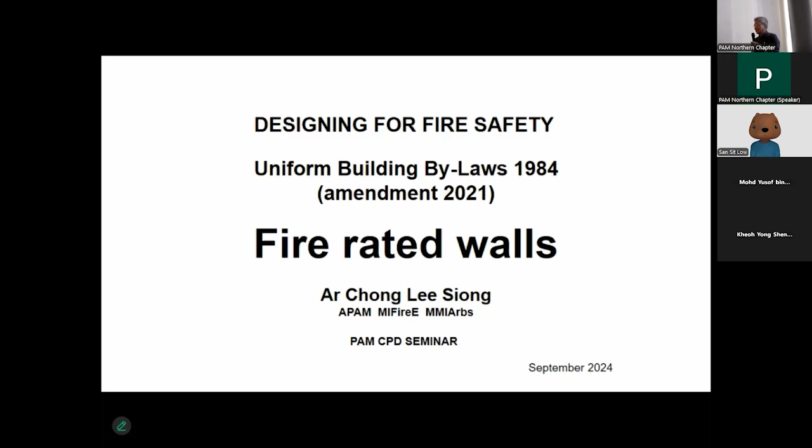this will probably be the last one in my lifetime. It just took us that long to put things together. And really, all the things that I've been saying and talking about, in all these seminars and all over the last 20 over years, I think most of it is really condensed into this book.

So I'm out of a job from today. Thank you very much, guys, for all your support.

I'm not alone. I'm definitely not the only person involved in this. If you read the front page, there were a lot of people, committees. Some people, only a small handful was left from the earlier 1999, the first committee, until now. There's only a few handful of people. We've gone through about 5 different Bomba director generals for this book. So yeah, it has been a very, very long journey, and we are very happy to have been involved in this.

So, further to that, because now officially it's been published, and Pusat Binaan is the custodian of the distribution, the printing and distribution of this book, I've been placed on an embargo. Everybody has been placed on an embargo now.

We will no longer be talking about this book or its contents until Pusat Binaan puts together a formal program. We are in the process of doing a program with Bomba, a formal one that will bring us through a series of courses, maybe you want to call it, that would bring us through to something official.

The original intention before we embarked on the rewriting of this third edition was that actually Bomba started with wanting us to assist them to formalize the Kursus Bomba for the firefighters to be implemented at Kuala Kubu Baru. So we did. We actually came up with a lot of contents, and we passed it on to Bomba, and they're already implementing it in Kuala Kubu Baru.

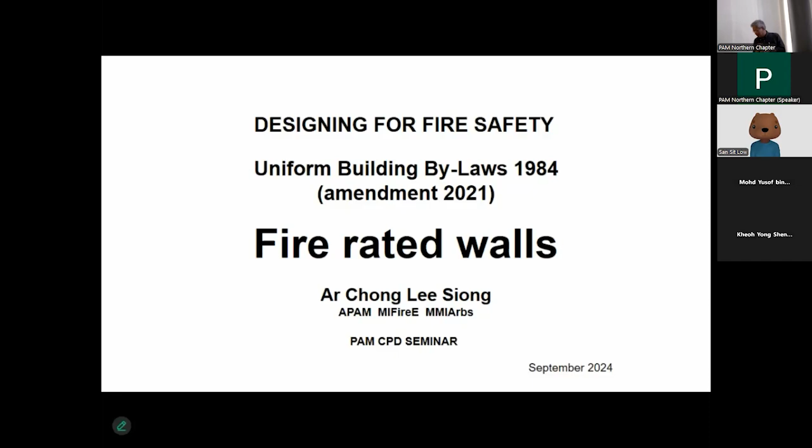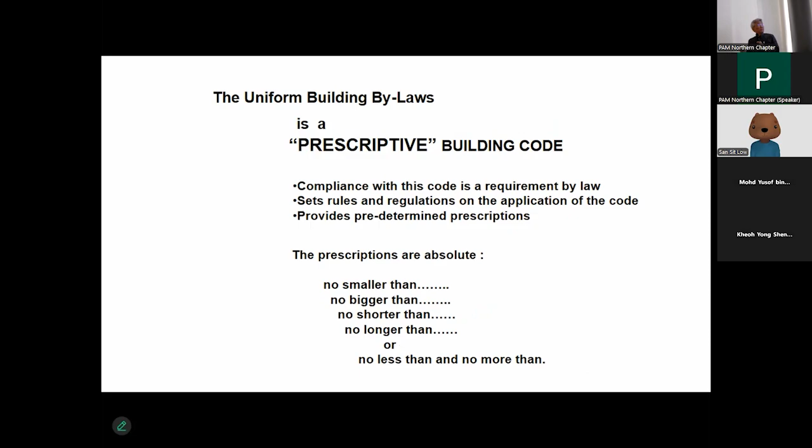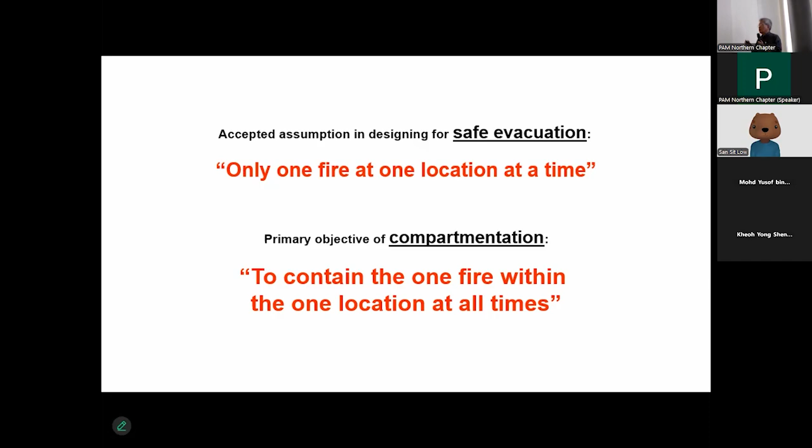Okay, so fire-rated walls. The UBBL is a prescriptive building code. We all know the concepts of fire safety. Firewalls are all about compartmentation. We always abide by the principle that when designing for safe evacuation, we're talking about only one fire at one location at one time. But compartmentation's purpose is to contain that one fire within that one location at all times. That's where compartmentation elements come in.

Particularly on fire-rated walls, in the UBBL we have 6 different elements specifically prescribed: party wall, separating wall, compartment wall, external wall, protecting structures, and partitions. So there are actually 6 elements here, and the common element is, of course, the word wall. We are now talking about walls.

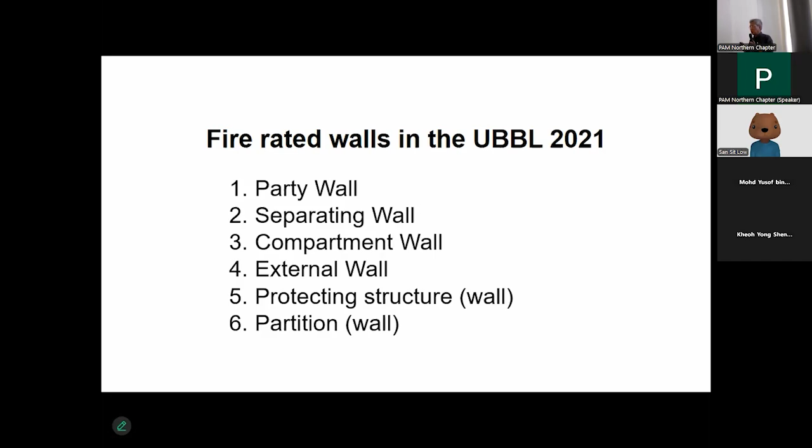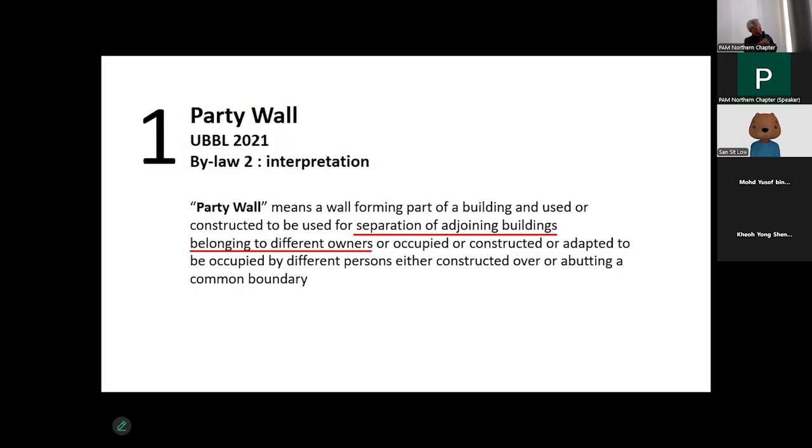So let's start with party wall. What is the interpretation of a party wall? This is something we all do every day. By the way, all of these slides are not my writing, they're extracted verbatim from the UBBL. So, party wall, by definition in the interpretation of the UBBL, simply means a wall forming a part of a building, or used or constructed for the separation of adjoining buildings belonging to different owners.

This is in Bylaw 86. Now, Bylaw 86 is not in Part 7 or Part 8 of the UBBL, where we always refer to for fire safety. It's in Part 6, under constructional requirements of the UBBL. So in a way, it's not directly related to fire safety per se. A party wall is an element for the sole function of being a physical separation between 2 buildings belonging to 2 different owners.

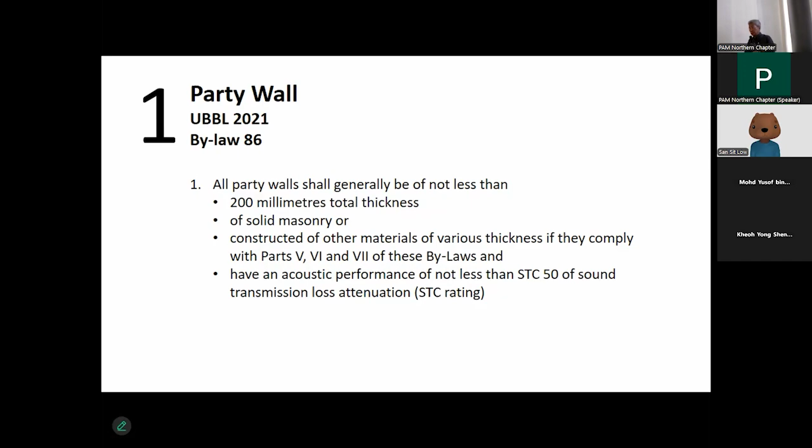So Bylaw 86 doesn't prescribe fire rating, but it prescribes the physical qualities expected of a party wall. That is what clause 86 prescribes. It says all party walls will generally have a prescribed thickness — a party wall should be minimum 200 millimeters thick, and constructed of solid masonry. So that's the base: you expect a party wall to be constructed of masonry and minimum 200 millimeters thick.

Then, with the amendment to UBBL 2021, I'm stepping into the boundaries now — never mind, I'll do it quickly and then we'll stop. Included in UBBL 2021, we've added another clause to bring it up to date: it can be constructed of any other materials of various thickness, provided they comply with Parts 5, 6, and 7 of these bylaws. Another addition in UBBL 2021 is to have an acoustic performance of not less than STC 50. So these are the physical qualities regulated in the UBBL 2021, expected of a party wall.

So it's a constructional requirement. It's really not meant for Bomba to tell you that you must indicate 200 mm thick masonry wall as a party wall. I know Bomba has been doing that - they're actually going beyond their jurisdiction when it comes to party wall. What Bomba should be doing, I'll describe later. But as far as what you specify for the party wall, it is not Bomba's business - it is ours. And which authority will be the one looking at this? It should be the local authority, the AHJ, authority having jurisdiction on this.

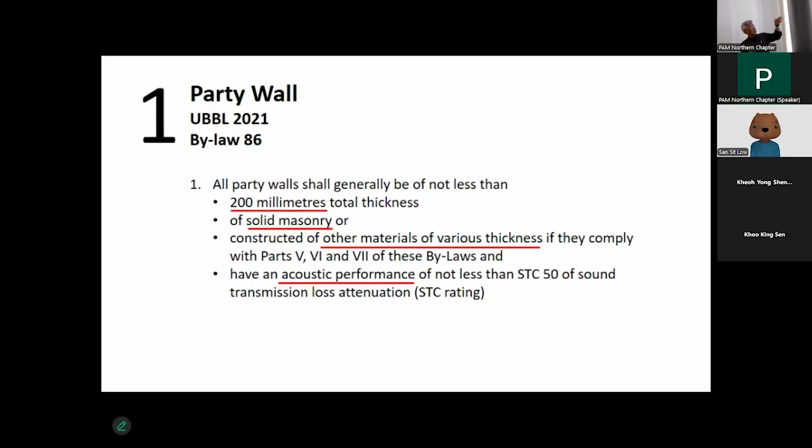And the same bylaw continues: such a party wall shall be made up of 2 separate skins, and each of the skins shall not be less than 100 millimeters thickness. Now you might say, oh my goodness, just now you said the solid masonry wall is 200 mm, and now you're saying it's made of 2 separate skins. No, it's okay, because it says it's constructed at a different time.

That means a party wall must be minimum 200 millimeters thick, constructed of solid masonry - they're expecting a solid wall between 2 parties. But if you happen to be constructing the buildings at 2 different times - if you build a semi-D first without your neighbor building theirs, and the owner of this semi-D is not going to pay for the neighbor's part of the thickness of the wall - go ahead, you can construct 100 mm. Simply because until your neighbor comes, that is not a party wall, it's just an external wall. It's only when your neighbor comes along that it becomes a party wall, and your neighbor builds his half of the wall. That's the purpose of this.

Number 3: multi-story residential buildings of reinforced concrete or other frame construction shall be constructed to the requirements of the bylaws, and the party wall thereof shall not be less than 100 millimeters thick. Now remember, I think we went through a lot of problems with Bomba - they're saying that if you build an apartment, the party wall, I want 200 millimeters thick. And we're saying, in the world, Bomba is not even in their jurisdiction here.

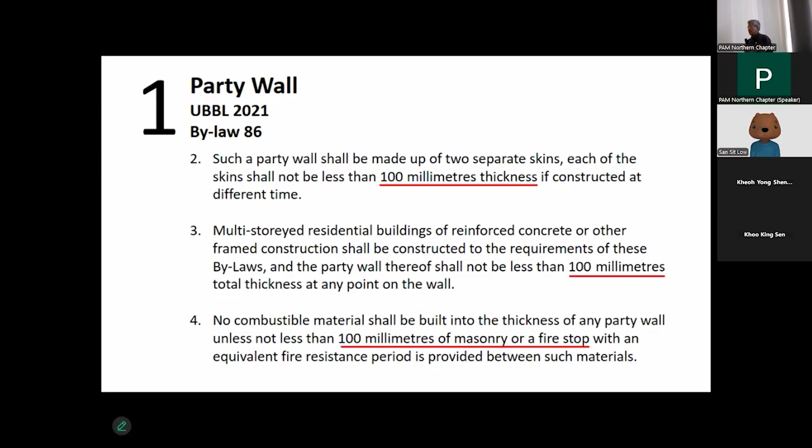Openings may be left in a party wall, provided written consent of the owners of the properties concerned is obtained in accordance with bylaws. And every opening in a party wall shall be reinstated to its original state, properly bonded, consistent with the use of such opening.

So why do we have this specific clause in a party wall, but not when we talk about compartment walls or separation walls? We don't have this clause there. Well, remember, this is clause 86, and clause 86 is in Parts 5. It's not a fire rating requirement.

So a party wall needs to be solid. And for fire safety, we do need fire separation between two adjacent parties. Now, if the two adjacent parties agree that they want to connect—say I bought two adjacent semi-D houses and for my big family I want to break down the wall to make one single bungalow—then there's no longer a party wall requirement. The functionality of a party wall ceases to exist if it becomes one single owner, or if the owners consent that they want the wall removed.

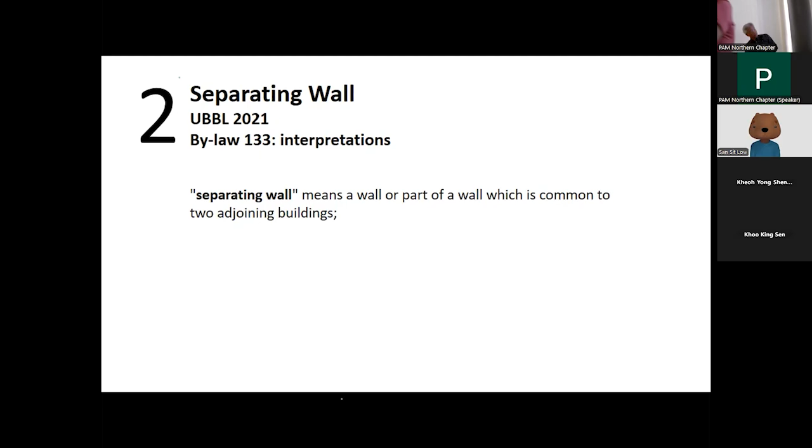So, separating wall, bylaw 141, subject to the exceptions specified, etc. The rest of it really just says that the separating wall...

If it's a separating wall, then you must respect that wall as a fire-rated wall, so you have to talk about the passing of flues and all that.

Now, the other thing—if it's a party wall, would you have a utility pipe or any services passing from one building to another? You just don't have that situation, isn't it? You definitely will not want your neighbor's plumbing going through the party wall into your house. It doesn't happen.

But if it's a separating wall, you figure it's serving its purpose as compartmentation. But if it's a single building, you may actually have services crossing each other. So under bylaw 141, as a separating wall, you have to preserve the fire integrity. This is where it specifies the prescribed minimum requirements of what can or cannot go through the wall, and when you require fire stopping.

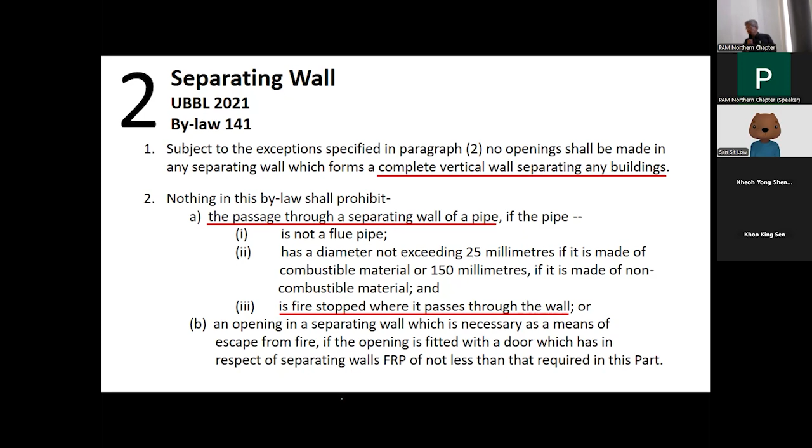So any separating wall which forms a junction with the roof, carried, etc. Now this is where the extension of separating wall above the roof comes in.

This requirement doesn't appear in the party wall. In a party wall, all it says is that you must have a physical separation between you and your neighbor. It doesn't talk about anything else, right?

But whereas in the 141, under the prescription of separating wall, it says that a function of separating wall is fire separation. So this is where it says that if you have a roof going over two adjacent properties, the separating wall itself must form a fire separation between the two parts.

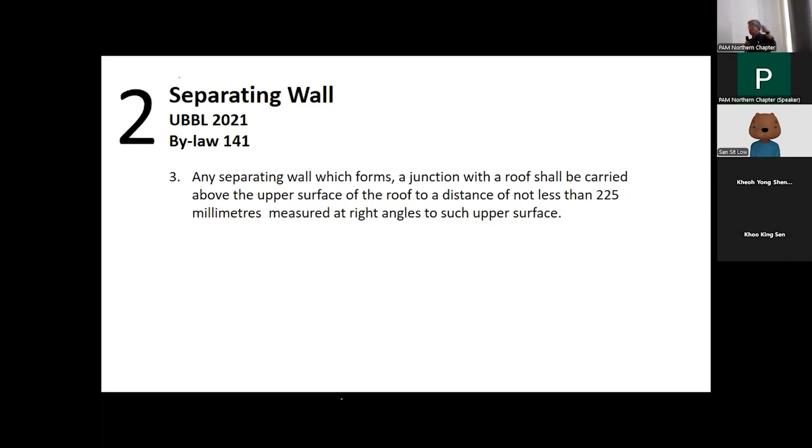That means even the roof has to be separated. You cannot have the roof of a neighbor, or whatever fire flame spread properties of the roof, be continuous across to your roof. That's the purpose.

Now, number 3, compartment wall. We just talked about separating wall, which is supposed to be separating fire. Now why are we talking about compartment walls? Is the compartment wall a separating wall? It may be, right? A separating wall may form part of a compartment wall, and a compartment wall may actually be functioning as a separating wall in certain situations.

So what is a compartment wall, and by inference the compartment floor? It means, respectively, a wall and a floor which complies with bylaw 148, and provided for the purpose of bylaw 136, to divide the building into compartments for any purpose under another bylaw.

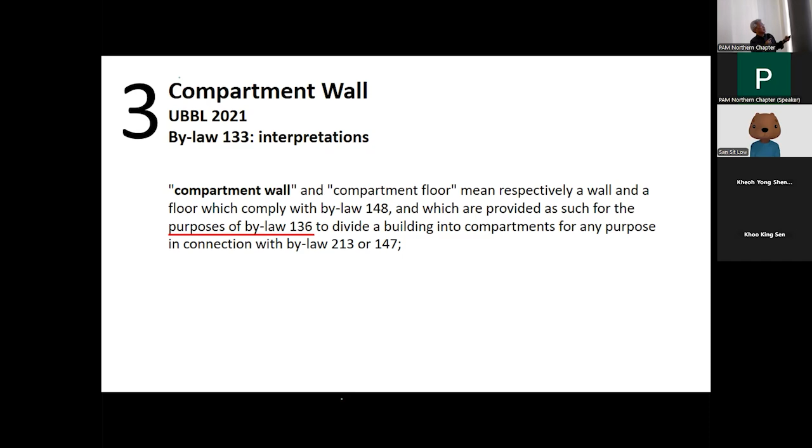Right, let's go straight into it. Generally, compartment walls are used for the purposes of first complying with, say, the fifth schedule. The fifth schedule defines fire compartment limits to your floor areas and to volumes for all the different building classifications. So when you need to subdivide a building into manageable fire compartment sizes, the elements you use to do that are called compartment elements, which are compartment walls, floors, and structures.

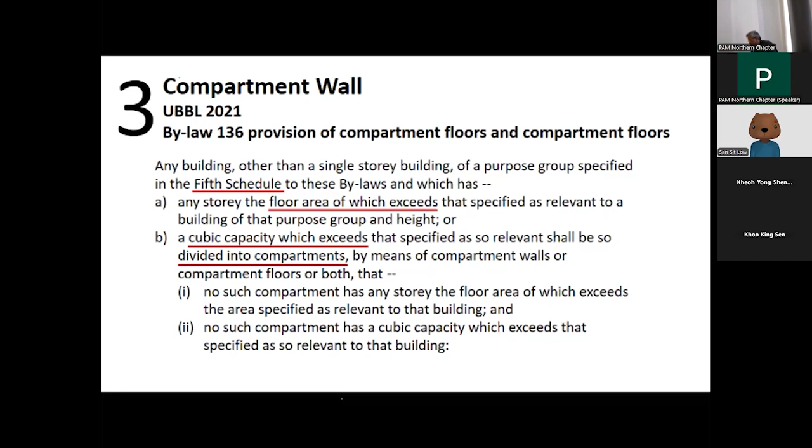Okay, never mind. Right, the following floors and walls must be constructed as a compartment floor and wall.

Actually, the better way to describe it is that these are the elements, or these are the areas of the components of the building, that should be compartmented, right? They should be fire separated from the other parts of the building.

So a flat or a maisonette, in other words, every single occupational unit in, say, an apartment, in a hotel, in an institutional building, it must be fire separated.

Any wall or floor separating a part of the building from any part which has got a different purpose group.

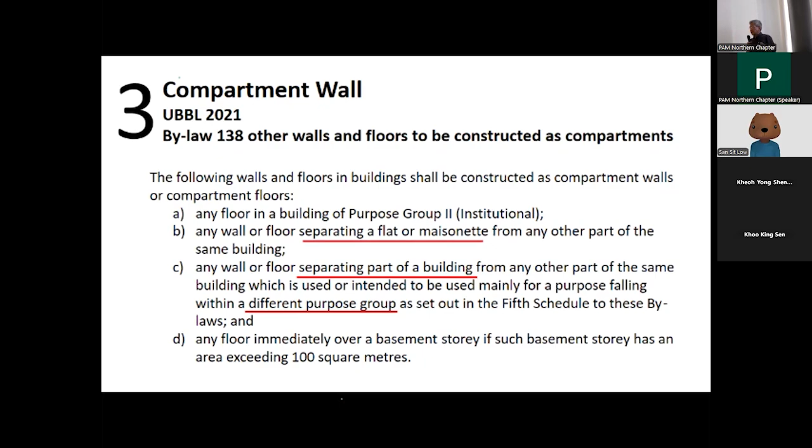Compartmentation of a basement, right? That means it's the horizontal element that separates a basement from an upper floor of a building.

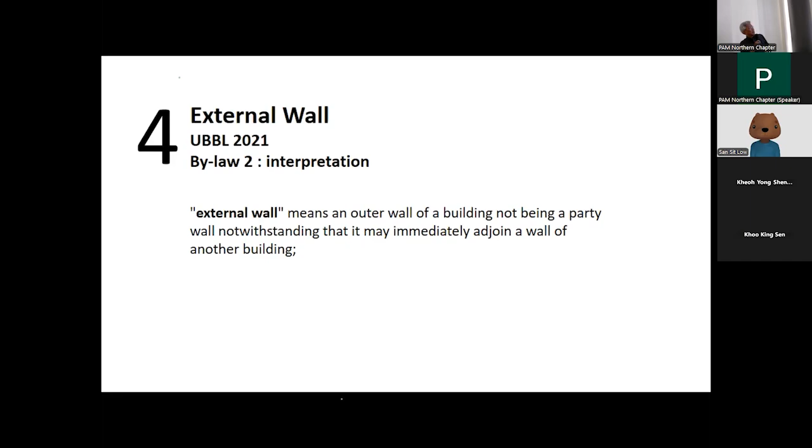Right, then we have external wall. External wall means an outer wall of the building, not being a party wall, notwithstanding that it may immediately adjoin a wall of another building.

So external wall. Now, there have been a lot of queries on this. Even from Bomba, there are some Bomba officers who say, hey, your external wall, what's your fire rating of your external wall? You must have a 2-hour fire rating on your external wall. They say, yeah, thank you very much. If I have a 2-hour fire rating on my external wall, that means I have no windows, right? You want me to put roller shutters on all my windows?

Do these blinds need to be fire rated as well? So the concept of external wall is very simple. External wall means external. If a fire is burning in here, the fire burns outside. What is the risk? What is the separation between the fire here and outside?

That's where the sixth schedule comes in. Okay, we all remember the sixth schedule, right? Very good. There'll be another 5-day lecture on that. So that's where the sixth schedule comes in.

You see, the requirement of an external wall to be a fire wall comes from the exposure, the proximity of your building with the adjacent property or with an adjacent risk. So on the elements, on the surface area that you require protection by calculation from the sixth schedule, that is the portion of the wall or the surface area that will require fire rating.

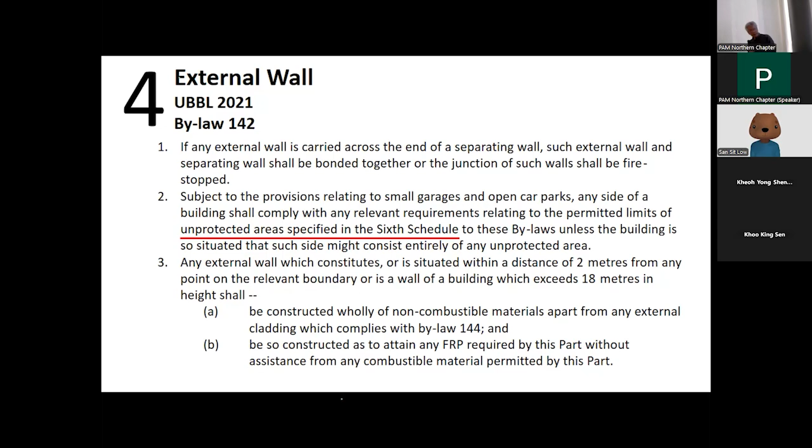And of course, when we talk about the elements that we clad on the external walls, that's where BS 8414 comes in, and we've already gone through that. So cladding on external wall, this is where BS 8414 comes in. The BS 8414 has got, I would say, nothing to do with fire rating - it's not for the purposes of specifying fire rating on the external wall. When we talk about fire rating, we're talking about fire penetration through the wall. BS 8414 is purely to control the flame spread of fire on the surface of the external wall.

So this would be read in conjunction with the sixth schedule. It is not to be independent - you do not say I comply fully with BS 8414, therefore I ignore the sixth schedule. It doesn't work that way. This is for the purpose of cladding, or if you're using sandwich wall construction like TMO, that will be subjected to BS 8414 Part 2. So that is not to specify the fire rating of the wall - that is purely to comply with BS 8414.

However, I do a bit of advertising - if your wall is subjected to the sixth schedule, and you need a certain percentage of the surface area to be fire rated, you can actually still use TMO, because TMO has got two certifications. They've got the BS 8414 Part 2, which is flame spread, and they also have the fire rating certification - two hours. So you have to recognize that these are actually two totally separate specifications: fire rating and BS 8414, which is flame spread.

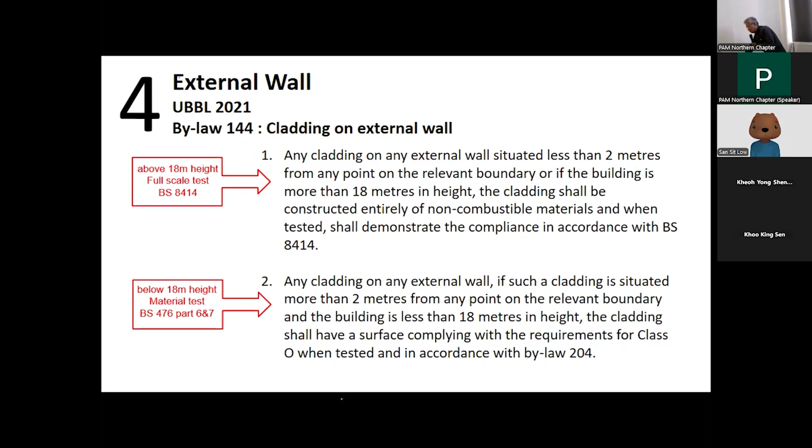Then, external walls - there's also this requirement of horizontal and vertical barriers on the external wall. We're all very familiar with this. So again, this is where the fire rating part comes in. You may have cladding on the outside, so I've got BS 8414 already, but don't forget, you still need to comply with the sixth schedule. Or even if the sixth schedule is not relevant to your project, you still have to, at the very least, comply with the horizontal and vertical barriers on the external wall - these are the flame spread barriers. Most times, the perimeter beams and perimeter masonry spandrels will make up these elements, and the cladding that you specify will be going in front of these elements.

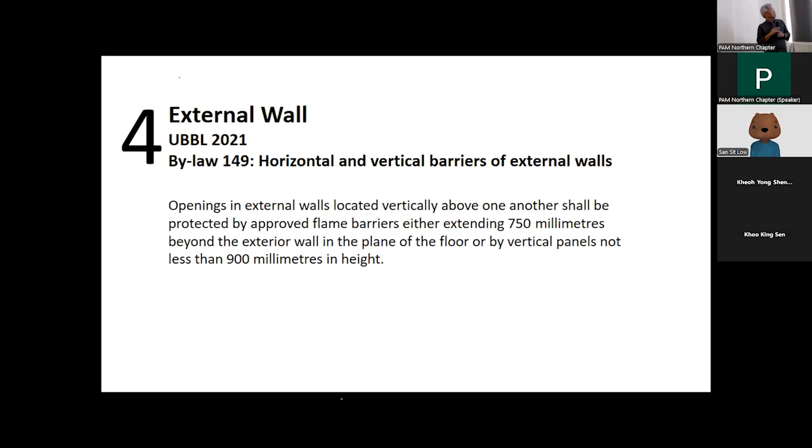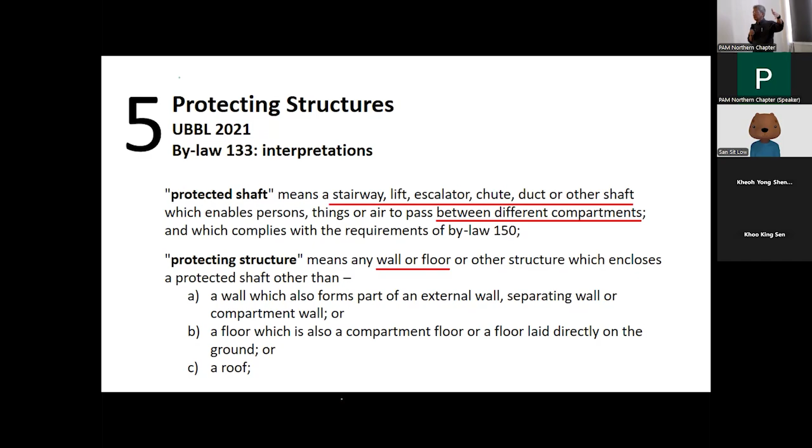Right, protecting structures. So on fire rating, protecting structures where FRP is specified, you go for protecting structures - protecting shafts. Protecting structures means a floor and wall, or any structure that's supporting the floor and wall that requires the fire rating. So I think that's pretty obvious.

Even in protected lobbies, any partitions having an FRP of not less than half an hour will require fire rating. And of course, we all know of elements of structure - any member forming part of the building. These are the exact descriptions of what constitutes an element of structure. When we say your building is subjected to a minimum 2-hour FRP requirement, that means every single element of structure, every one of these components, shall be constructed to have an FRP of no less than what's specified.

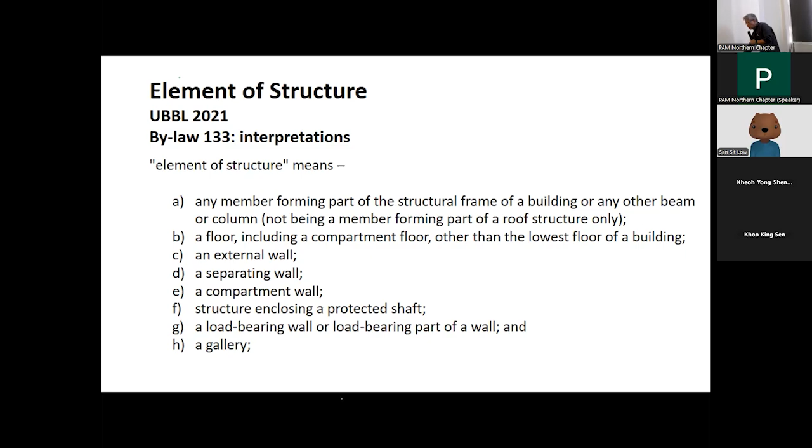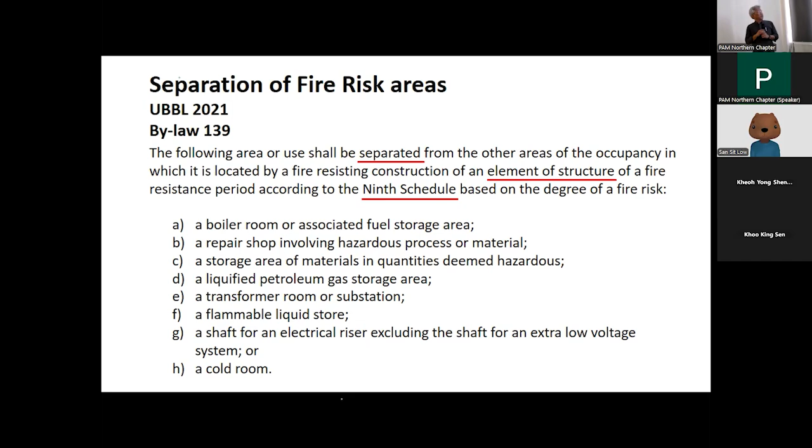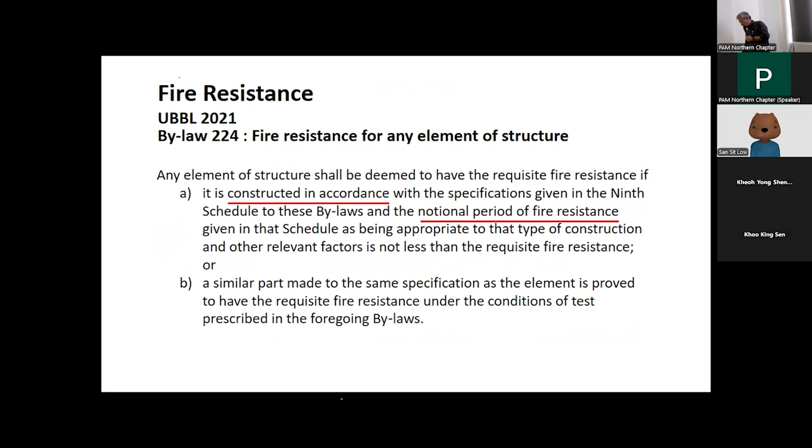And the fire resistance shall be as specified in the 9th schedule. Any elements of structure that form part of those fire separating components, or that hold up the fire separating components, must be similarly fire rated. So we're talking about FRP now - fire resistance period, fire ratings.

How do we determine if these elements comply, if what we're specifying complies? Well, the first thing is that in the UBBL itself, we already have the full list of all the deemed-to-comply elements of fire rating. But in any case, all of it comes from here.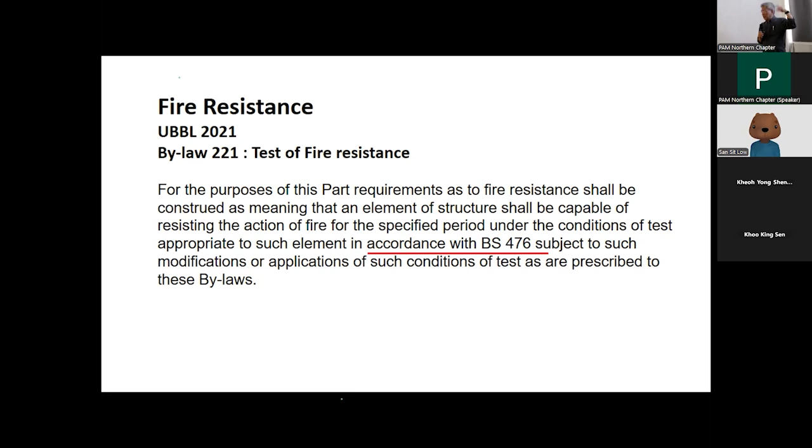Test of fire resistance - it will be in accordance to BS 476. Lawrence mentioned BS 476 earlier this morning. Now, BS 476 is on the way out. It's been around for too many years, and it's been superseded by the new EN standards and basically all the international standards and new methods of testing. There are about 25 different parts of tests in BS 476 - they're all kind of outdated, because the 476 is just very, very limited in terms of its application. I'll be talking a little bit about that later when we talk about fire stops.

So now come back to the critical question: party wall, separating wall, compartment wall. When is it a fire wall? When is it a party wall? When is it a separating wall? When is it a compartment wall? How do we specify the buildings we design? How do we refer to that?

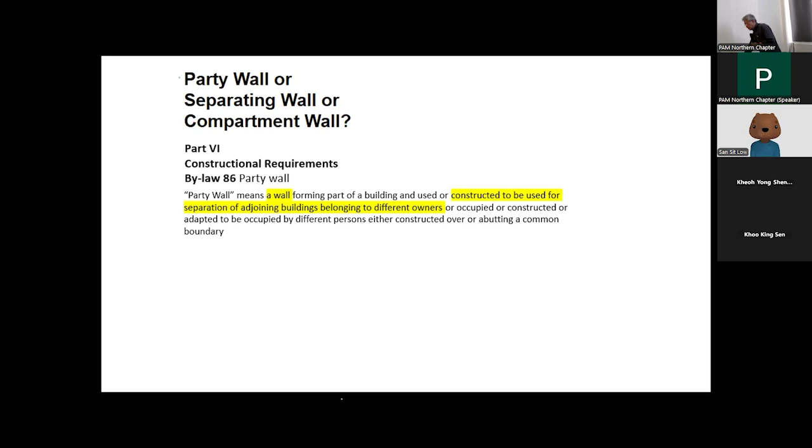Okay, so we go back to the specification. A party wall means a wall constructed to separate adjoining buildings. So the regulations for a party wall - you look at the compartment, the fire safety requirements. Under construction requirements, the only mention of a wall of any interest is that of a party wall. Under fire safety regulations, there are specific specifications for how you construct a compartment wall, a separating wall.

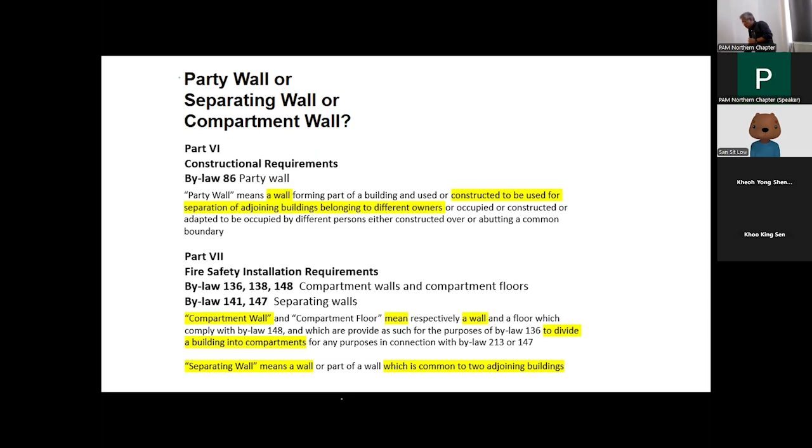So as an example, if you talk about a terrace house, the wall separating between you and the neighbor is definitely a party wall, right? So you have to construct it as a party wall - it's landed property. So what are the physical qualities of a party wall? 200 millimeters thick, masonry construction. That's it, very simple.

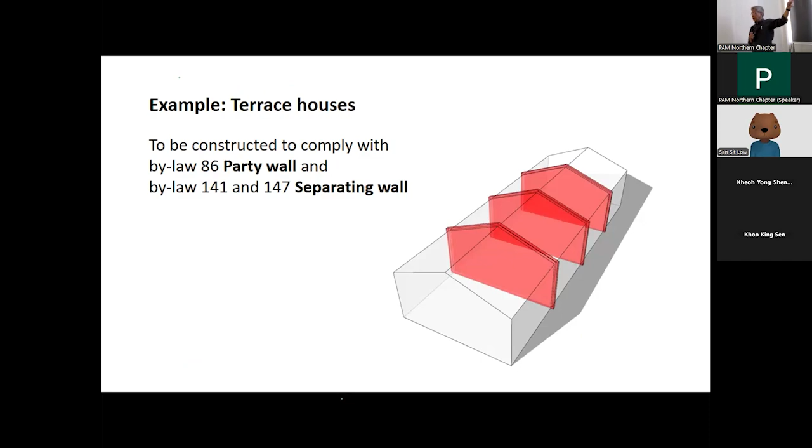Then you'll have to also construct it as a separating wall. So a separating wall comes along with a fire rating, FRP. Of course, we all know if you build a 200mm masonry wall, it already gives you a 4-hour fire rating. But the requirement for a terrace house - do we know what is actually the required fire rating of a terrace house?

It's actually 1 hour. If you refer to the schedule, for a single house, it's actually 1 hour fire rating. And then for a single standalone house, it's actually 0 - there's no rating required, which is why you can build your single bungalow house entirely out of timber and nobody will bother. So if we talk about terrace house, technically, the house only requires FRP of 1 hour.

Okay, minimum 2-hour fire rating. It's nonsense. It's all wrong. It's just that the constructional prescription of a party wall already by default gives you such a high fire rating anyway.

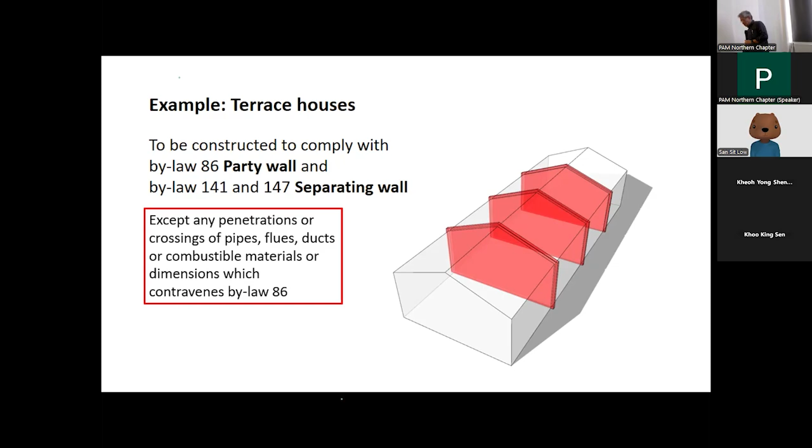Then multi-story apartments - so you have the construction as a party wall. And how thick will this be? You can make it 200 mm, nobody can stop you. But the requirement is minimum 100 mm.

And then you also have to construct it as a compartment wall, no longer a separating wall. No - a separating wall, if you happen to do a low-cost apartment where on the topmost floor you save on the concrete flat slab, and you put a pitch roof on the topmost floor of the apartments, then yeah, it becomes a separating wall, and the separating wall must go beyond the roof.

But otherwise, if you have a flat roof, then it becomes a compartment wall. And the compartment wall construction - the additional requirement is just to ensure whenever the compartment wall joins another compartment wall, it's fully sealed, as the term implies. Compartment means you have to have a fully fire-tight compartmentation. And again, you're not allowed to have any penetrations, because it's a party wall.

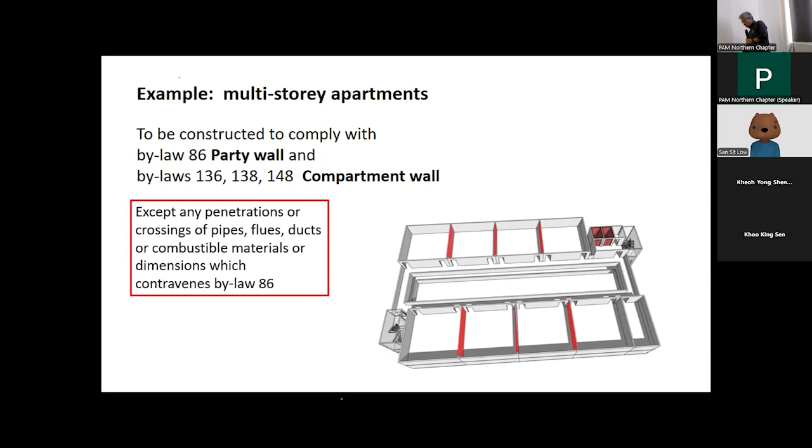Then you might say, if that's the case, why even bother having this prescription of a separating wall? Why not just say all party wall and be done with it? No, there is a purpose for a separating wall because it's a fire safety matter. Separating walls and compartment walls are used whereby you want to limit the size of your fire compartment. For example, one case where a separating wall really comes in handy for us architects is a case like this.

Having a single building of this nature, you've got the lower portion, you've got a higher portion. So for a building, any reference to the height of a building for the purposes of specifying firefighting shafts, and for the purpose of the fifth schedule, references to height of buildings relate to purposes of compartmentation. The taller your building goes, the smaller the limit of compartments are. So if you have a building like this, the height of the building is this part. This is one single building, so that component over there will be subjected to the same prescriptions for a building of that height.

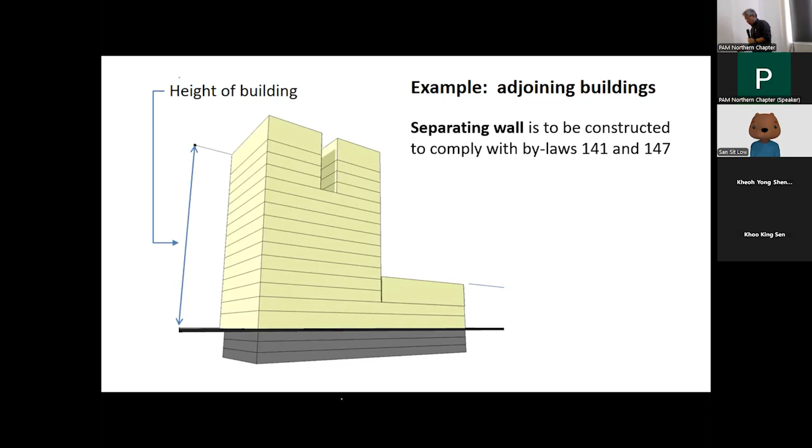This is very common in the case of a multi-use building, for example. However, if you actually install a separating wall there, then the height of the building will be measured differently.

Part A of the building will be measured to that height, so the prescriptions of that building would be in accordance with that height. Whereas for part B, the prescription of this part will come from the measurement of the height of that building.

Why? Because we've got separating walls. Fire burns upwards, you don't want it to spread sideways. So if you can have a separating wall to prevent the risk of fire burning across to that side, then it's like your terrace house. Your neighbor can burn down for all you care, but the fire is not supposed to come across to you. This building will then get the privilege of whatever height it is.

Let's say this building is less than 18 meters. That component doesn't require risers, it doesn't require fire lifts. And in terms of compartmentation below 18 meters for this purpose group, maybe you'll find that you've got 56,000 cubic meters to play with if you've got sprinklers.

Whereas on this part, this building will be, say, 40 meters high. You will have your firefighting shafts, your wet risers, and compartment limits for certain specifications may go down to 11,000 cubic meters. So this is the purpose of a separating wall. But of course, it's a separating wall.

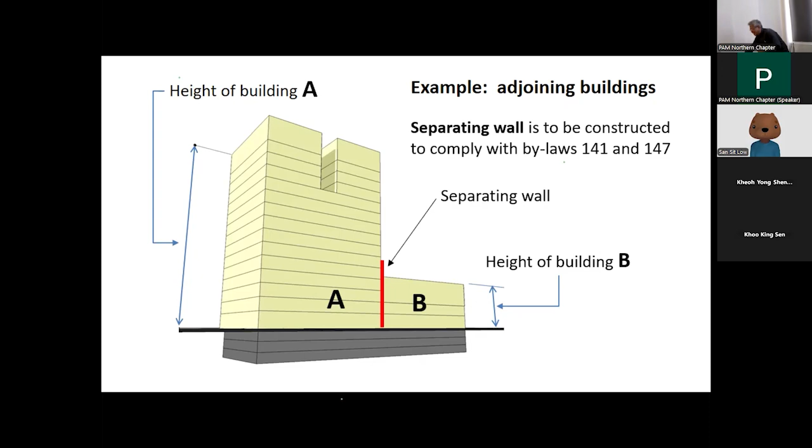Okay, no problem. All right, now leading to what we are talking about earlier on, so we have now had a full description, a full understanding of this component known as a wall, fire-rated wall.

Now, back in 2012, 12 years ago, Bomba issued this circular. At that time, it was very rampant, where people were doing very large-scale warehouses, or even these strata title shops, offices, and all that, where they have very long travel distances, single doors, especially the warehouses. Warehouses and these large speculative factories. And then they want to rent it out, either factory, warehouse, or whatever tenant they can get, they happily do it, and they find that they are exceeding compartment limits, they're exceeding travel distances and all.

So to get away with it, there has been a lot of situations where people started using drywall, fire-rated drywall construction for this purpose. They put it up so on plan it looks okay. We got compartment, we got horizontal exits, we got limits of travel distance, and we got limits of fire confinement volumes. The moment you get a CCC, new tenant comes in, all these drywall partitions get brought down because the drywall construction is so easy to dismantle and move away. So Bomba had a lot of issues with that.

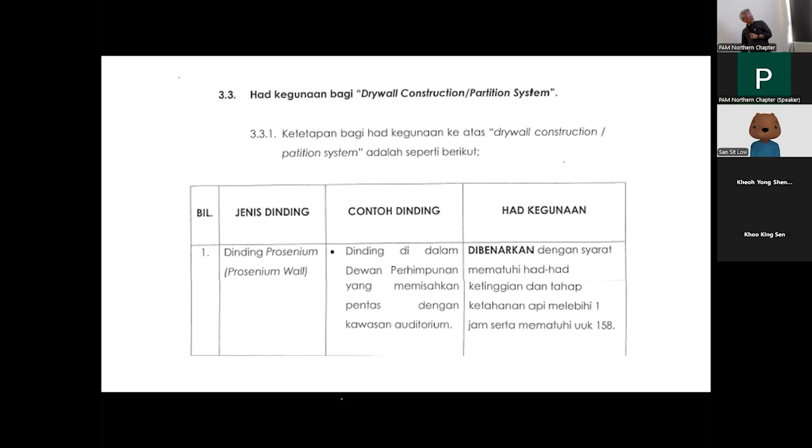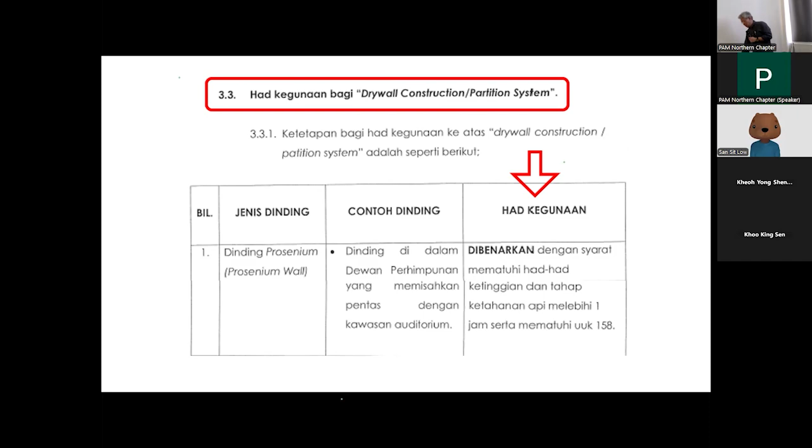It specifically tells you what you can or cannot do in the application of the bylaw. So in a proscenium wall, yes, you are allowed to use drywall construction. Particularly they're calling it drywall construction partition systems. So by inference, it also applies to Trimo and sandwich panels, anything other than masonry construction, anything other than concrete or block walls or clay bricks, masonry construction. In terms of protecting structures, you cannot use drywall.

In other words, you're building your fire fighting shaft, the fire fighting shaft cannot be a drywall construction. No other leeway. A party wall, a party wall cannot be a drywall construction. A party wall says minimum 200 mm masonry wall. No doubt, we did add in the third clause that says you may construct it out of other materials, provided it doesn't go less than 100 mm and you respect the thing.

But this directive is still enforced. We did talk to Bomba quite a few times. They said, do we want to retract this directive now that we know a lot more already of this situation? They said no, you still keep this because they just don't want the situation where people take advantage of this and start abusing the system. So the party wall, you're still not allowed drywall construction.

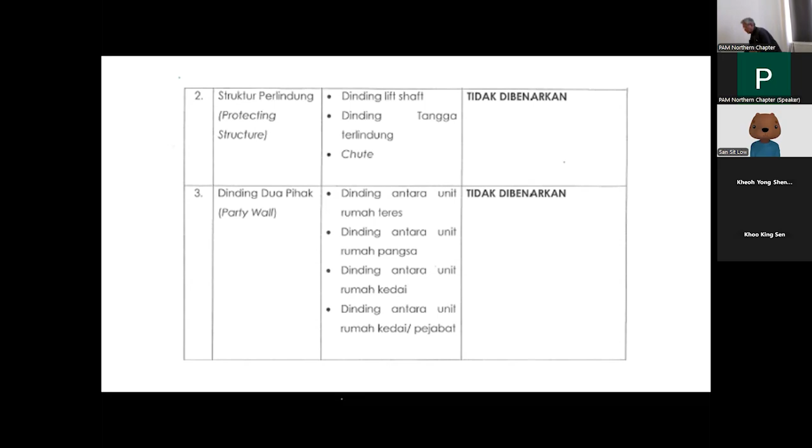So just going down further, compartment walls that are used to reduce volumes, walls for the purposes of reducing fire compartment volumes or for the purpose of separating fire risk areas or separating different purpose groups.

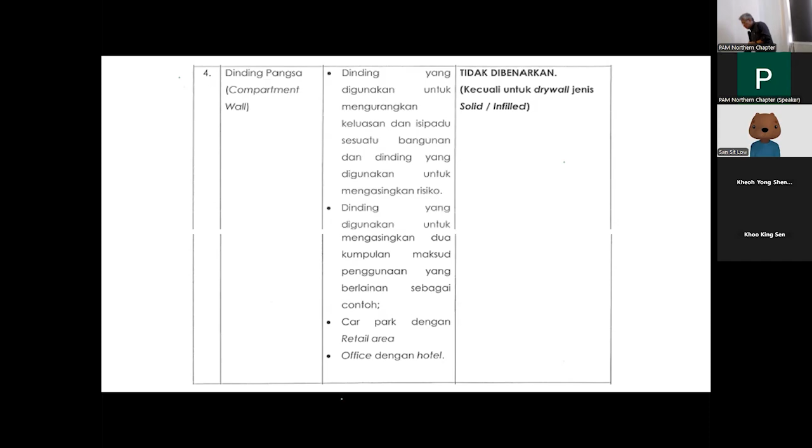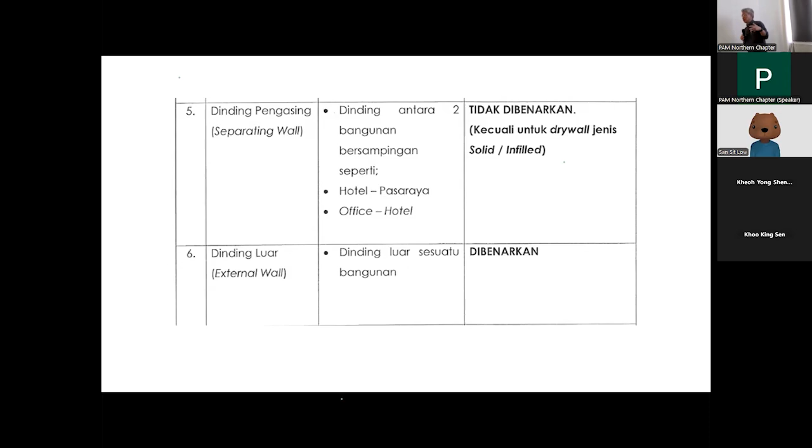And separating walls, no, it's not allowed. See, separating wall, just now party wall doesn't allow, right? But if it's functioning as a separating wall, yes, it's allowed, provided it is of a solid and infill construction method. Then external walls, yes, of course, external walls, all the thermal panels and all that, provided you first, if you actually need a fire rating to start with, yeah, but more importantly now is that you have to comply with BS 8414.

Okay, I'll come to that just a little bit later. Yes. Oh, concrete precast, then you actually consider it masonry. Yeah, if it's a precast concrete, it's considered a masonry, there's a masonry wall.

Okay, now this is very important. So when it comes specifically to the references to bylaw 139, the elements of bylaw 139 is about specifically identifying rooms of special hazards, right? All of that is not allowed. In other words, if you specify that room as a utility room, or that's where you're going to store your LPG or diesel storage or the boiler rooms and all that, it has to be viewed to be permanent. You have to use a full masonry wall. You cannot use a drywall construction.

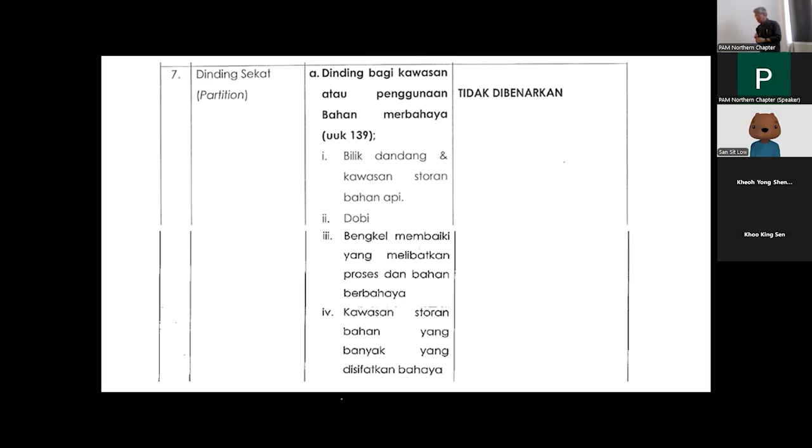And etc. etc., all this is a 139. Then filing rooms in an office, yeah, go ahead, use a drywall partition for filing rooms and hotel rooms. So hotel rooms, are these party walls or separating walls?

Remember, there is that clause that's saying that every maisonette must be fire separated from the adjacent parts of the building. Well, hotel rooms are not different owners, right? So they comply under that prescription of a separating wall. So therefore, separating walls, yes, you're allowed, but of course, it just qualifies it a little bit more. There should be no openings and there shall be no conduits and wirings inside there, etc., etc.

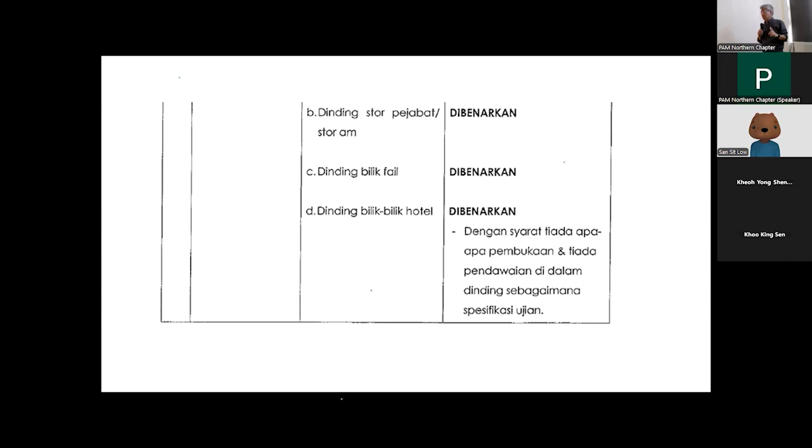And what they're really trying to say is that your method of construction must get bomba certification. Now, I'll come to that now. Okay, just still on that, protected corridors, yes, you're allowed to have it, right? Except where it involves sleeping risk, of which then you require solid or infill construction.

Then firefighting access lobbies, no, non-negotiable. You don't want a situation where today they see a firefighting lobby, tomorrow they come in, my wall is gone, firefighting lobby anymore.

Where? Sleeping risk is like in hospitals, hospital wards. Hospital wards, you cannot use drywall construction except solid and infill. So it's like a separating wall, same degree of risk as a separating wall, not a party wall, but a separating wall.

Like for example, if you're doing partitioning of an open office space where you start to rent out individual tenants, then these tenants must have separating walls. So when these tenants come out of their room to a common corridor, that common corridor will have to be considered protected, i.e. separated from the tenancy risk of the individual tenants. So this one they allow because they know that, say, a speculative office environment, running distances, we really use 2/3 anyway. But once you start doing all this partitioning, these things will change over time.

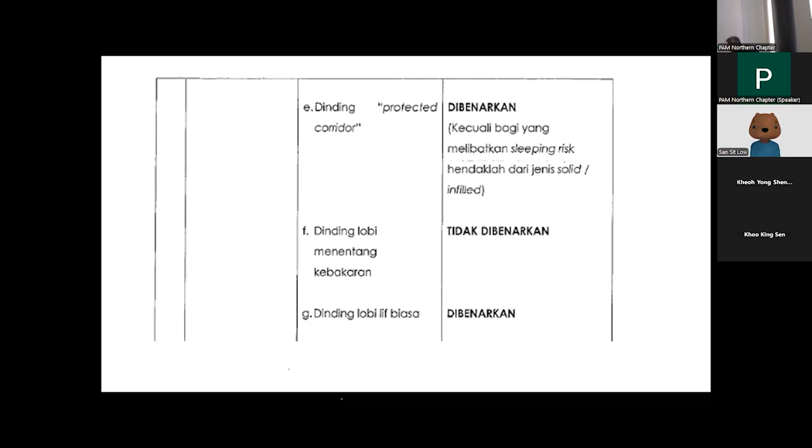Data - 12 years ago they talked about big data, actually talking about server rooms. But today we are using it for data center, data hall, the white halls. So yes, it's allowed. What else have we got?

Operation theaters in hospitals - no, they do not allow. So it has to be masonry construction, because they regard that as a specific fire risk, both inside out and outside in.

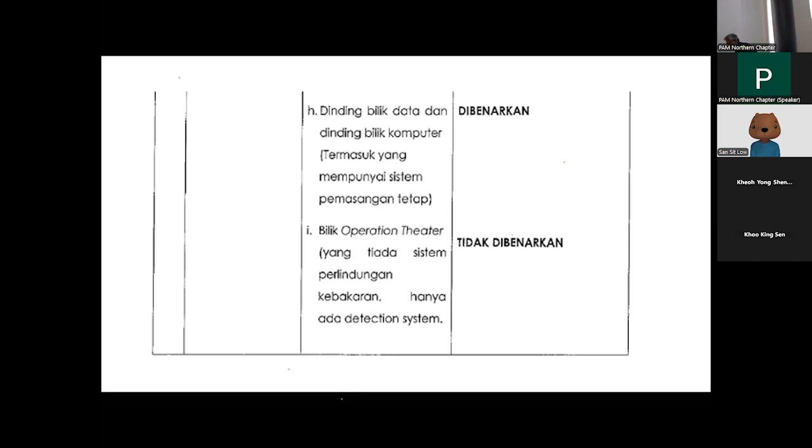So therefore, to summarize: these are the requirements of the ninth schedule in terms of the UBBL requirements of your construction, of how you construct the respective separating wall, compartment wall, or party wall. This is where we may use drywall construction, provided it's of a solid or infill specification. And then here will be the drywalls which are not classified as solid or infill - it will have its fire rating, but it is not classified as solid infill. Now, how is it classified as solid or infill? It is at the point of you submitting it for certification, for the SIRIM test, and for the BOMBA registration, the BOMBA certification. So BOMBA will then look at your construction details and they will give you the classification, and they will also specifically put in the BOMBA certification what are the limitations in accordance to this chart.

I'll advertise a little bit for Trimo because we really appreciate their support. For example, Trimo's sandwich panel, the one that's fire rated, BOMBA has given the certification. It specifically says solid infill and not permitted as a party wall. So you can use it for any other application as a fire rated wall, but not permitted as a party wall. That is the way in which BOMBA controls it.

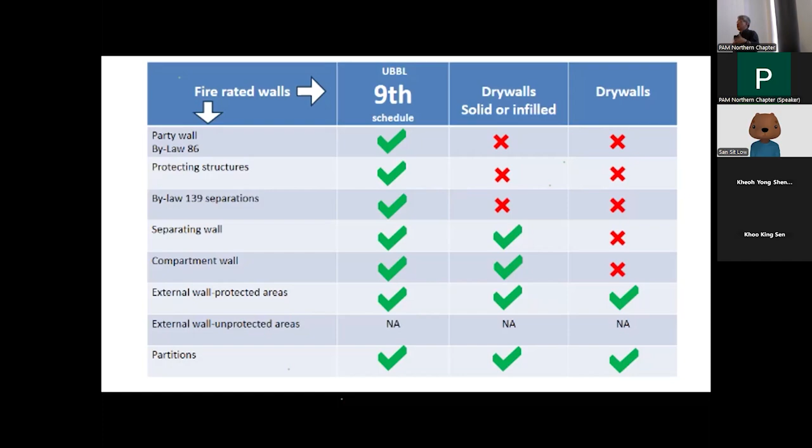Yeah, let's hope that we can retract this directive. They retract this directive, then we can go back to purely on a performance approach, in terms of our specification and how we construct. Yeah, but as it stands, this is prescriptive.

The circular is still in force, and Bomba officers are very, very -- what's the word? They're very, very insistent, not only aware, they really, really insist. Yeah, these are the few little things that they can catch the architects very easily.

Actually, there is no jurisdiction over party wall now, but they were fully involved in all of this, and just put it this way, we won't want to argue, because it's not worth our effort.

Let's just spend a bit more money on masonry walls first, and we'll wait another few years. We will want to continue our dialogues with Bomba. This is just one of the many things that we do want to rationalize.

At the moment, party wall is really not a problem, because I think everyone has really accepted that for party wall, you have to do masonry. It's only all the other internal parts, especially like data centers.

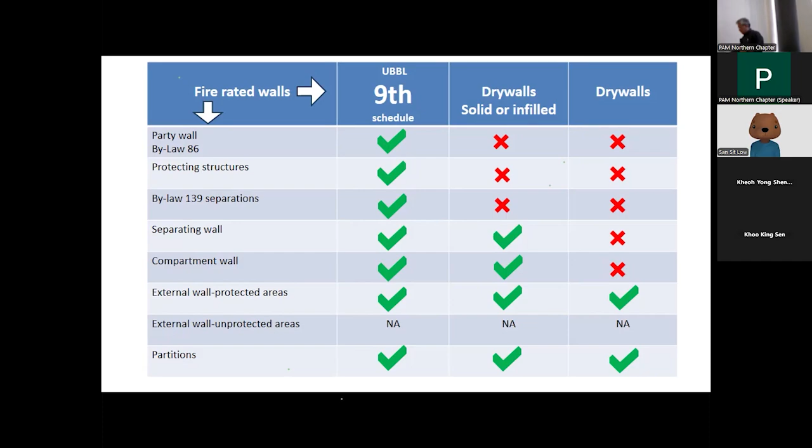Okay, so this is on the fire walls. All right, so now you guys want a quick toilet break, or you want to continue?

I will now go on to fire stops. Carrying on from here, we talked about the separation already. Now we go on to fire stops.

Why do I do this immediately after this? So that you just gather around here, lah. I'll do a sketch. Too difficult. Let's have a discussion over here.

Okay, so now we go on to fire stops. Okay, so we talk about compartmentation, separation, and all that. Now, for the utilities of penetrations that are allowed to go through walls, right? How do we do the fire stopping?

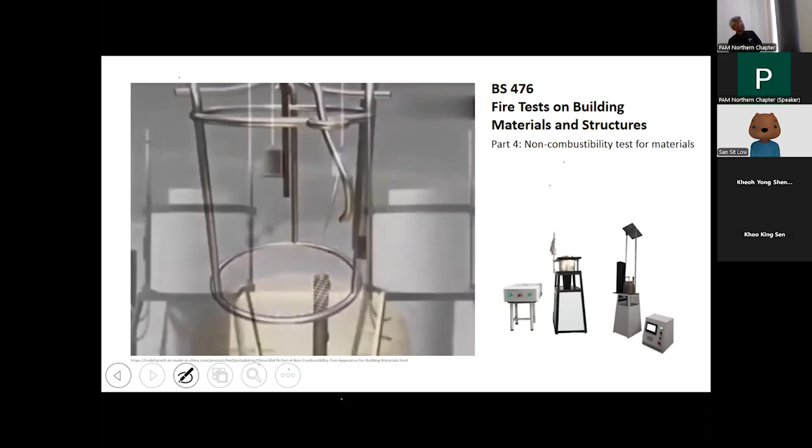They get two samples of the material, very small samples. One is the target test material, the other one is the base comparison. And they just test it - they put it in the furnace. Two materials: one is the target test, the other one is the base reference material. They put it in a little small chamber.

They heat it up, it burns, and they measure the flames. They measure the temperature. And they measure the oxidation or the degradation of the material, and they weigh it. That's it. And the material is that size, right? So that's how they test non-combustibility.

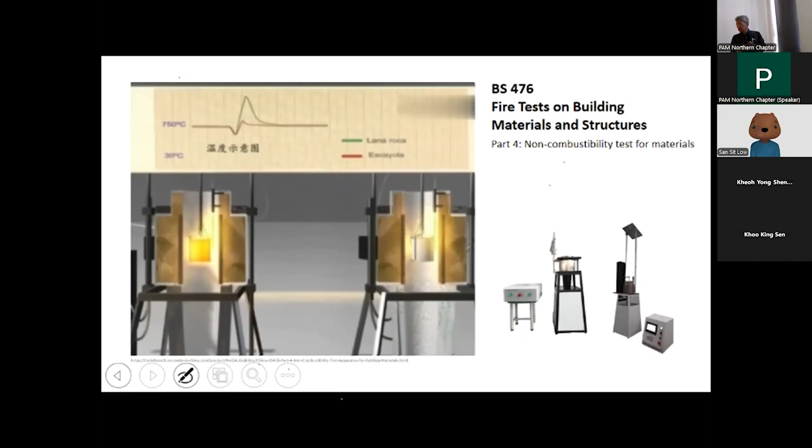That's why I say BS 476 is really on the way out now. It will be replaced very soon. But for now, that is what we have in the UBBL. If you specify anything deemed to comply in the UBBL, okay, this is how they test for non-combustibility.

So is cement mortar, gypsum-based plaster, gypsum-based vermiculite non-combustible? Yes, it is. So yeah, you can use this material as a fire stop. You'll be using it by default anyway, without us specifying, without anyone looking at it. The person who made the decision and the person who did the actual work is the Indonesian plasterer that happens to be working on the job, and he's really decided for you that he'll be using that same plaster to fill up. All right, so it complies with non-combustibility.

The fire resistant period as the wall or the floor - we do not know. We do not know. Exactly, we do not know, right?

How do we test for fire resistance of an element of structure? Is BS 4 - how do we determine that? It's actually BS 476 Part 22. This is the test we use to test sandwich panels for fire rating. This is the test we use to test the clay brick walls for fire rating.

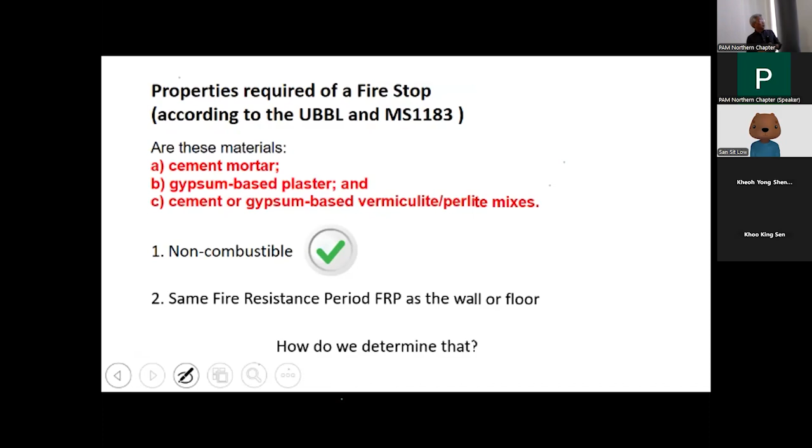These are all proprietary materials already, and they've all been tested according to EN and ASTM standards. Bomba hasn't exactly hit on this yet, but we have already been working on it. I've already applied it for all my current projects. Very soon, once they settle down on the Red Book and a few other things, I think the next direction is they want to start emphasizing this. So let's get ourselves prepared.

So we do have to take the effort to specify proprietary materials for the various types of fire stopping that we require. You can see there are all kinds of different penetrations, especially with the kind of buildings we're doing today, like data centers. There are just so many penetrations. Even our very simple industrial buildings have so many services that have to go through. So these are the standards we have to look out for, and a lot of these materials have actually got Bomba certification. The manufacturers have taken the effort to get it.

So I'll share an example of how I've done it in my projects, and I hope that will help everyone start moving in the right direction. For our projects, we're currently using all BIM modeling and Revit modeling and BIM common data environment information, because this helps us a lot. Otherwise, it would be impossible for us to track all the complexity and specifications we go through. BIM modeling and common data environment really assist us a lot in tracking what we do.

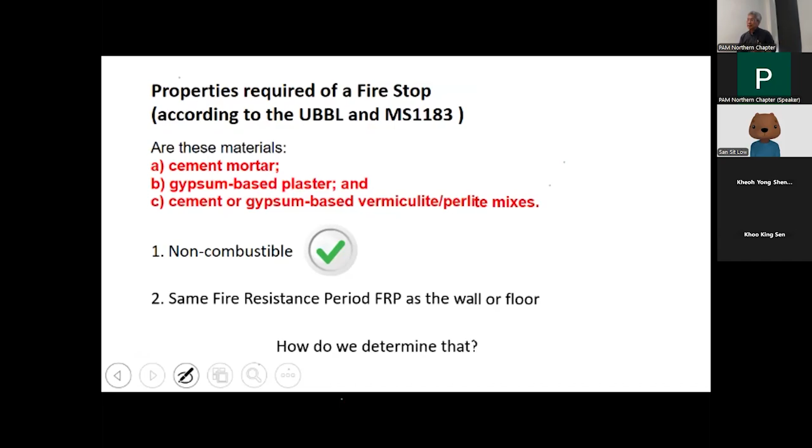Yeah, just - yes, yes. There's a block that's called an intumescent block, like class C, like class C. It comes in blocks.